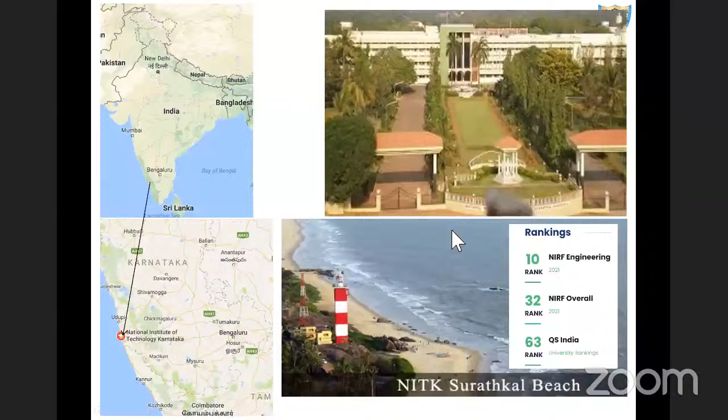So let me talk about the foam. There are two types of foams: one is a closed cell foam, another is open cell foam. So now I'm going to focus on closed cell foam.

For an example, let us take moduli. So in general, in composites, we plot a two-dimensional graph wherein the x-axis is the volume fraction of the filler or reinforcement, and the y-axis is that property, which in the present case is moduli. Then we plot a curve or a behavior wherein as the volume fraction of filler increases, we see what happens to modulus.

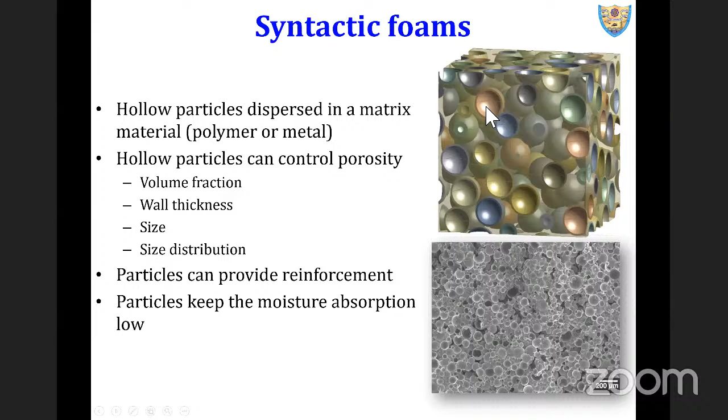So here typically these microballoons are in the particle shape. Those are spherical in nature. Many particles are available. Glass are engineered ones, and those are commercially available.

Fly ash cenospheres are naturally burnt ones, which are environmental pollutants. So from the fly ash, you can extract the hollow particles known as cenospheres and utilize them. These are naturally abundantly available environmental pollutants, so you can find and utilize them in components, products out of them. Engineered ones are available from many companies.

In addition to the spherical one, we have cuboid ones, silicon carbide, Al2O3. But as these have corners, they induce stress concentrations within the system once you disperse them in the matrix, and thereby generally we don't prefer these.

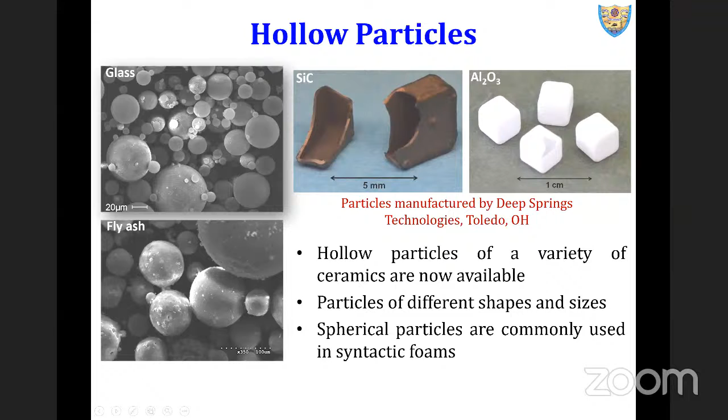We prefer the spherical shape - no stress concentration, and there will be uniform spread of resin around it, because that is a crucial parameter in composites, wherein we talk about the wetting of matrix onto the reinforcement or filler.

There are many applications for composite systems: aviation, thermoforming plugs, wherein you bend the sheet in a specific form. These are the plugs which are used to bend them. Here we need minimum coefficient of thermal expansion, because during a mechanical process heat gets generated, and if you can keep that minimum, then these plugs can easily release the sheet without any additional mechanism.

And that's how many types of these foam plugs are available. Then there's widespread use in offshore applications, wherein we're extracting oil somewhere deep down the sea and transporting it to the shore. When we need to do that, we need to send this crude oil through a pipe, whatever fluid we extract there.

If we don't rope it with these yellow colored modules, known as syntactic foam modules, the pipe sinks and there is every chance of rupture of the pipe and spillage of the fluid which the pipe is carrying. And that's how we rope them in these syntactic foam modules, which keeps them floating on the water, avoiding any damage to the pipe.

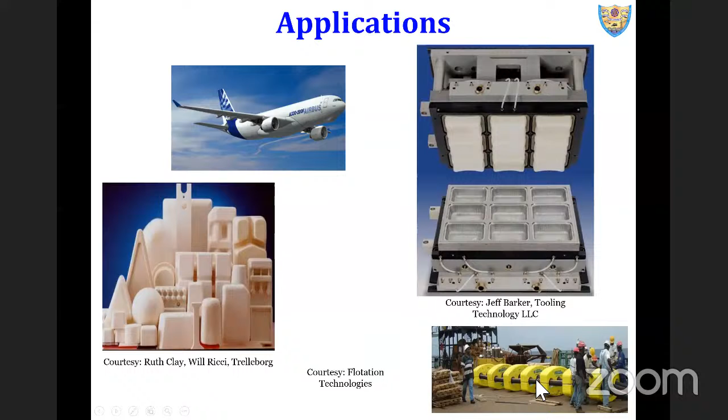There are many applications, as mentioned by Professor Nikhil Gupta in one of his papers on applications of syntactic foams, wherein we have a human-operated vehicle Alvin, used to find the wreckage of the Titanic in the 1980s, which carries 3 people on board, and we need the foam to be part of this module to go deep down the sea at a specific depth.

And we have remote operated vehicle Jason, which is a maintenance module for underwater pipelines. At many areas of warships, it has been used as well. James Cameron used a module completely made up of syntactic foam, known as Deep Sea Challenger.

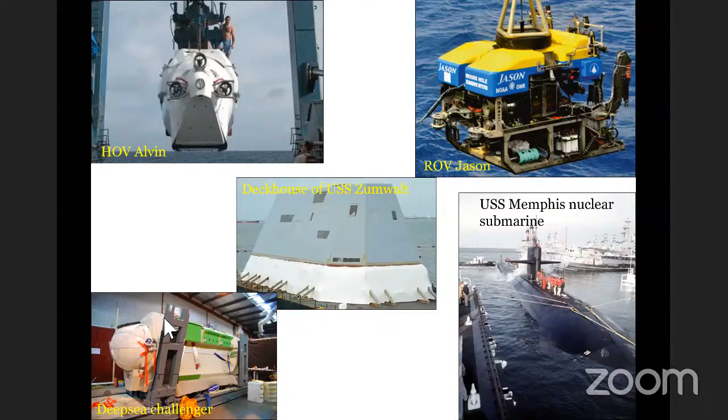So in the present talk, I'm going to focus on what my research group was doing in the area of syntactic foams. We are exploiting high density polyethylene with cenospheres, fly ash cenospheres, which I mentioned, which is a naturally occurring pollutant, and engineered glass microballoons as well.

We kept the filler percent the same so that we can compare apple to apple. Below 20%, when you infuse this reinforcement, which is in spherical hollow form, we'll end up with a higher density material, which is not suitable for buoyancy applications or lightweight structural, weight-sensitive structures.

Above 60%, a lot of particles or fillers start interacting with each other in the matrix system, and there's every chance that particle to particle interaction causes them to fail and break. Then the density shoots up suddenly. And that's how we kept it the same, based on our pilot experimentations.

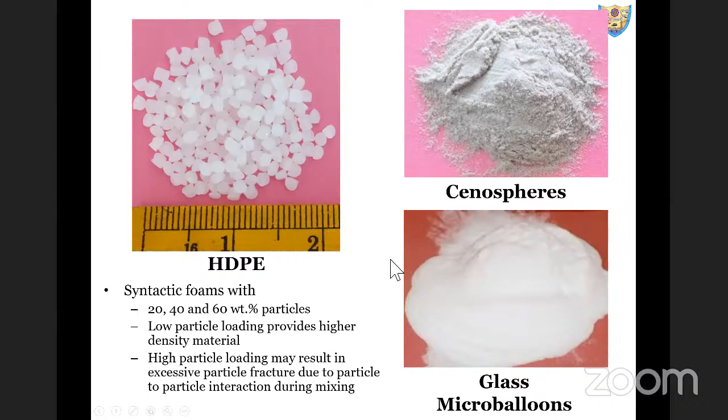We exploited many industrial scale manufacturing systems to produce these foams, starting with injection molding, compression molding, and recently 3D printing. And that's how my role in 3D printing of foams comes into the picture as part of this talk. So I'll let you know why we jumped to 3D printing - where was that gap we found out in 2016 to switch over to 3D printing, and therein we explored the additive manufacturing route for manufacturing foams.

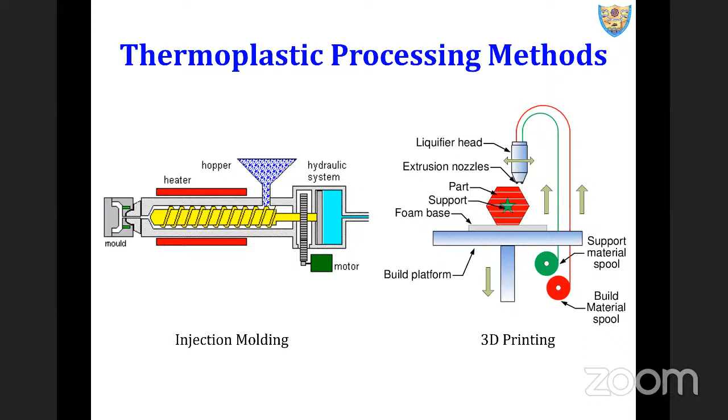This work was collaboratively done with Professor Nikhil Gupta of New York University. So what we did as an outcome of the first PhD student from my group in 2016 is this.

Konkan Specialty Polymers Limited from Mangalore, Conspec, supported us in this task, wherein we used their injection molding machine on the shop floor. So this was completely an industrial scale development and not laboratory scale development, where laboratory scale development happens in a very closed and controlled environment.

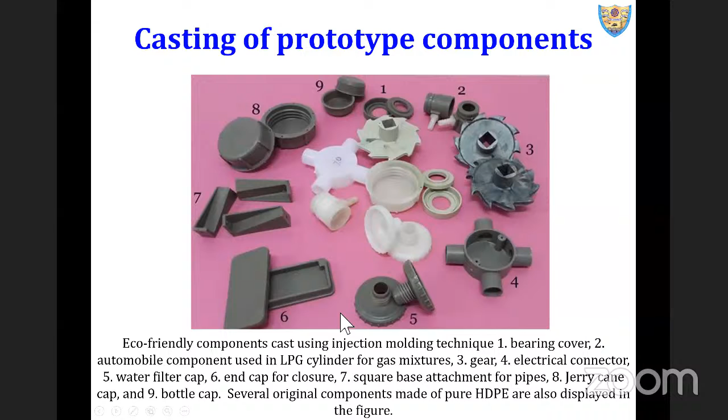Everything went well except component number 3, which I'll show you again here. If you see this component number 3, which is a polymer gear, you can see multiple white patches here. These multiple white patches signify that the fly ash cenospheres, which are gray in color, didn't reach these locations. The obvious reason is complex geometry, with thin to thick section continuous change.

And this made this component fail. Fail in the sense it worked well mechanically, but appearance-wise, in terms of dispersion of cenospheres, this component did not show that prominence in injection molding.

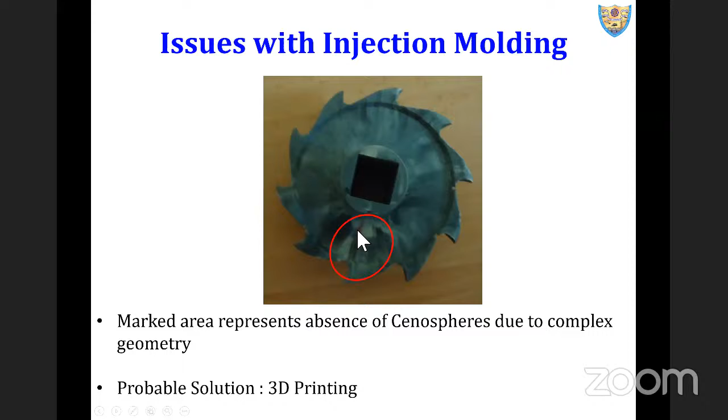So as part of this problem, which came up in the PhD thesis of my first student, Bharat, we proposed this problem to the Department of Science and Technology System Development Program under the Additive Manufacturing Technologies scheme back in 2015, arguing that since this is a problem in injection molding, 3D printing would be a viable option to resolve it. That's what led to the first funding I got in 2016 to additive manufacture the syntactic foam, thermoplastic based.

As part of this 3D printing, as all of us already know, this is the 6th day you are going through. It's the CAD file which we send to a device known as a printer, and this CAD file gets converted to a layered deposition at the printer level. That means we have very high flexibility of design change without any additional cost for tooling, as against any other conventional manufacturing methodology.

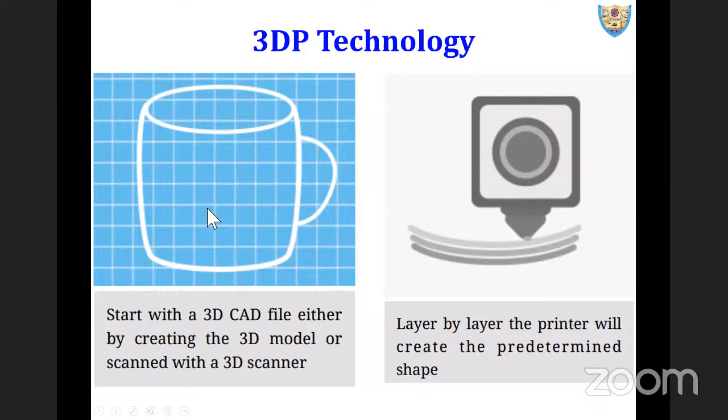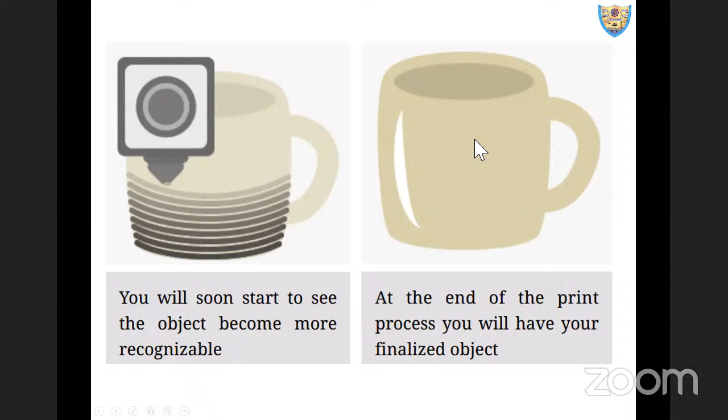So if I want to change the shape, I can just change the CAD drawing, and the printer immediately starts printing and realizing that particular component in the next batch. So it's a highly flexible system. Tooling cost is zero, with minimum lead time.

So what I'm going to talk about is fused filament fabrication system, which is also known as FDM. The FDM word is copyrighted, so I'll use fused filament fabrication, wherein the wire or filament, made up of polymer, is fed to an extrusion head. The extrusion head melts it and deposits based on whatever CAD file you have sent, which gets converted to a machine language known as G code. So it traces that path, and on a platform, you build a particular component.

This is the setup we have at NITK Surathkal since 2016. All the machines are still running and being exploited to their maximum potential.

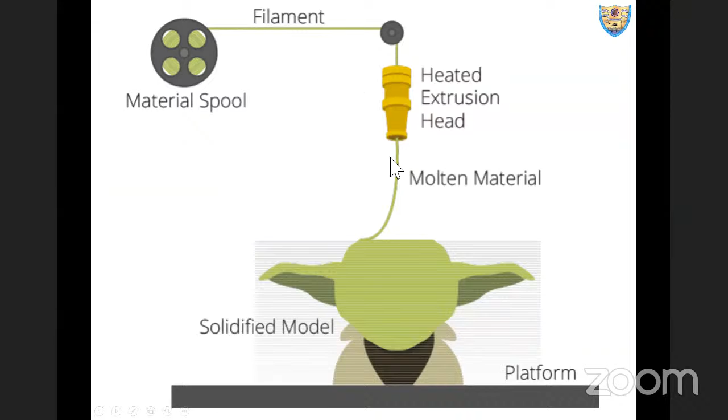So here we have a 3D printer having a build volume of 500 millimeters by 500 millimeters by 500 millimeters, with a temperature range up to 450 degrees C. And we can utilize any filament we want. This system cost me 20 lakhs, procured from AHA 3D in Jaipur, Rajasthan.

Now, we manufacture our own filament as part of this DST project, which got completed in 2020. For that, we have a single screw extruder, which is non-vented type.

Here we feed the pellets, composite pellets, into the hopper, and draw the wire required for a 3D printer. Generally two diameters are preferred: one is 1.75 plus minus 50 micron, and the second is 2.85 plus minus 50 micron. So that we can manufacture here.

The composite blend is prepared in a polymer blender, wherein we mix the polymer and whatever filler you want, melt it, and blend it. The blend comes out, we shred it, chop it, and load it into the hopper of an extruder. So this is the first heating cycle.

Second heating cycle, and the third heating cycle. The third heating cycle is in this heated extrusion head. So likewise, there are three heating cycles the polymer comes across.

So we need to really look around all the basic characteristics and characterizations of the polymer pertaining to TG, melting point, and degradation temperature. And those parameters will set the limitations for blending, extrusion, and printing. All these systems are available.

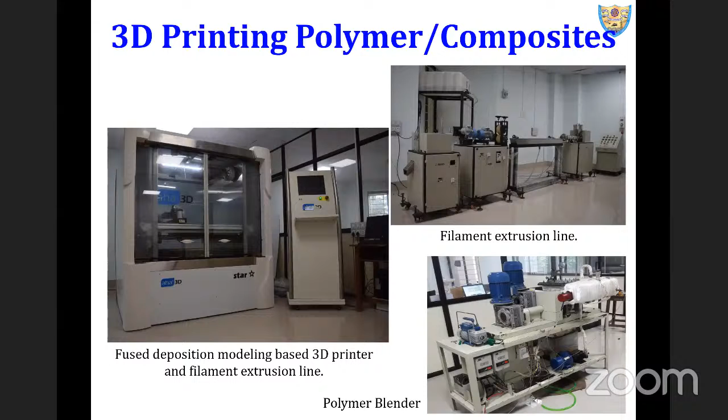These two we procured as part of the DST grant. So whenever we talk about in-house filament manufacturing, and whenever the developmental efforts are for material innovation, then we need to devise, define, and develop our own material system. And that's how these three systems are being used for that.

When we do that, we need to find out suitable parameters for blending, for filament extrusion, as well as for printing. So in this filament extrusion, we have barrel temperature, wherein we have a barrel here. There are four heating zones.

This is procured from Asabi, Thane, Maharashtra. Then we have die temperature, screw speed, and takeoff speed. These define the filament diameter, whichever way you want. So barrel temperature and die temperature decide, from the feed section to the die section, what temperature profile you want. And that again we decide based on TG, melting, and degradation temperature of the polymer.

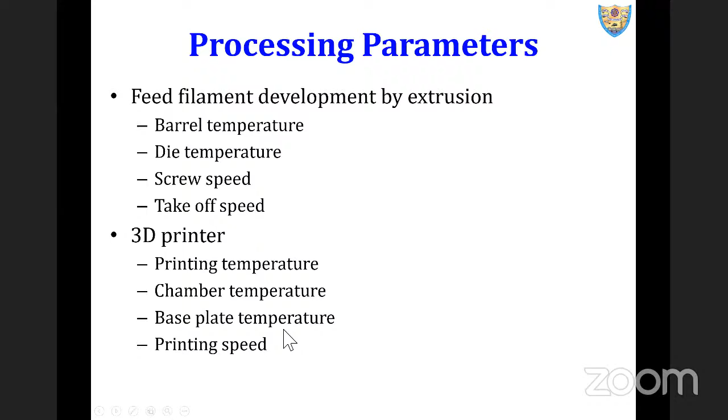Then we feed these filaments to a printer, wherein printing temperature, chamber temperature, base plate onto which you deposit the material, and the printing speed need to be tuned.

So as part of the syntactic foam development pertaining to this filament, I'm going to talk now.

That means we need to modify or optimize and find out suitable extrusion parameters. We did so, and finally we got these good filaments which are 2.85 within plus minus 50 microns.

These are air pockets, and these are because of the machine limitation. As I mentioned, the machine we have, a single screw extruder, is a non-vented type, and thereby the flue gases get entrapped. Interesting to see is that these flue gases, or air entrapment, have been uniformly distributed. So we have reported that as well.

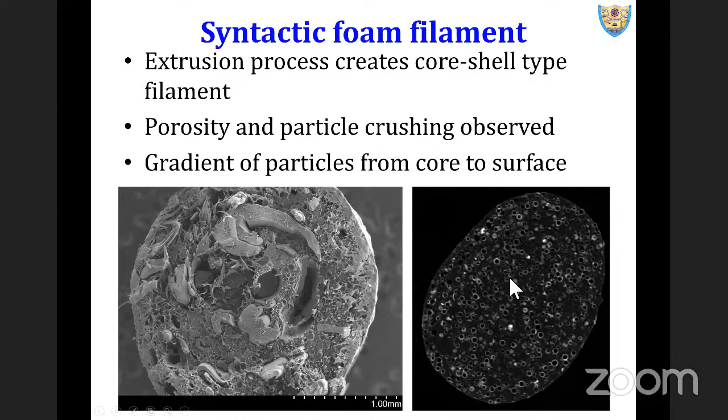This is 40 percent by weight in HDPE matrix, this filament, one time extruded. 1x means, then 2x is this one time extruded filament which we chopped again, pelletized again, and extruded again, and that becomes 2x here. And this one more cycle gives 3x.

Now 1x, 2x, and 3x, we did that to check the recyclability potential of the developed filament, number one, and to check how many micro balloons have survived, so that we can have that syntactic foam or lightweight effect.

So this is an additional exercise we did at that time. No doubt there are a few failures, and those are also quantified and reported in our previous publications.

We can do CT scanning at 3 different planes of any material system and look around how the distribution goes.

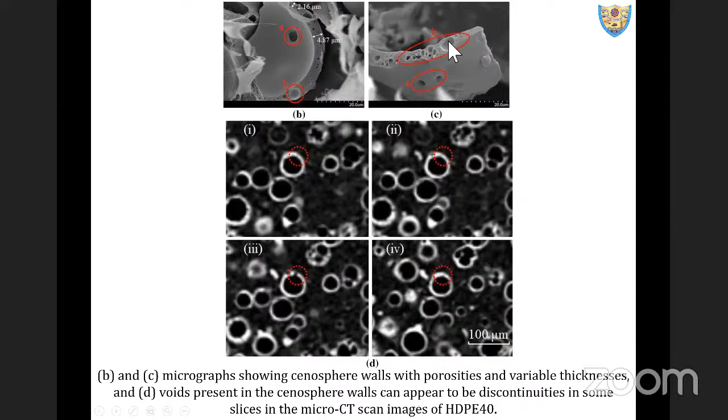Because these fly ash cenospheres are naturally burnt, they have a lot of surface defects on the surface and within the wall. This is the broken cenosphere. If you can see this, the wall thickness is variable and even the wall is porous. So when you do the micro CT, though the microballoon is intact, it seems to be broken because of these inbuilt wall thickness porosities. So we need to interpret the micro CTs carefully.

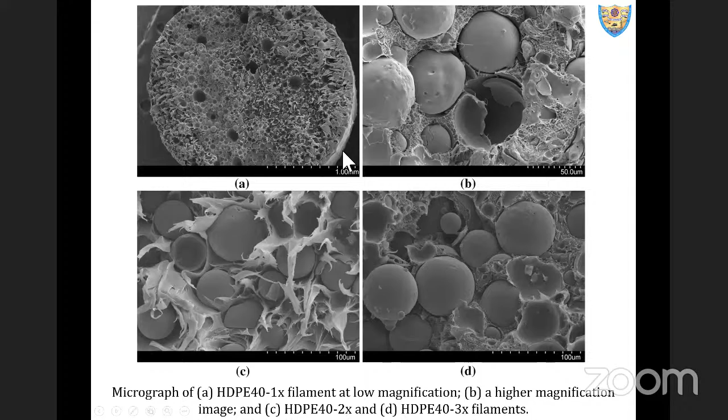Now, once you develop this filament, before jumping into 3D printing, you need to have a counter check. And that counter check we did here. So we compared the filament, the filament which is 2-time extruded, 3-time extruded, with the injection molded sample.

Now what do you mean by injection molded sample? It is 165 in length, dog bone type, strip type. So we have compared the filament which is developed with the full-fledged dense sample. And this is one counter check probably advisable before jumping into 3D printing after filament extrusion or filament development.

And what did we see is the 3-time extruded sample is performing better than the 1-time virgin injection molded sample. So this means it definitely makes sense to utilize this filament for 3D printing, wherein the 3D printed part is going to perform superior than the injection molded sample. So this probably is a good counter check that all of us can do whenever we have developmental efforts.

And here the same filament has been tested for 3 different strain rates. ASTM standard says 1 strain rate, but you can always increase or decrease the strain rate, which will give you additional insight of material behavior.

So how do these values signify to physical applications? I'll just take one simple example. 10^-4 is the slowest rate of loading. Relatively, 10^-2 is a higher strain rate of loading.

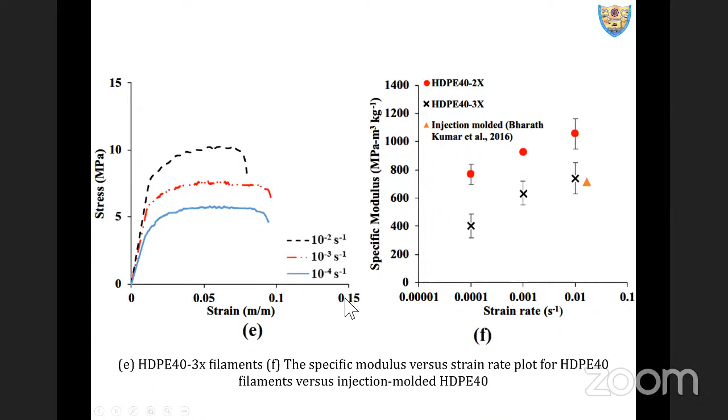And that's how it is useful if you do your mechanical test at different strain rates, which gives you additional insight that if the strain rate changes, how the material behaves. And this is what we do for sole development, wherein material development, we need to look around different applications at different rates of loading. So this is an additional thing all of us can do once we develop a new material system.

So once you develop a 3D printing filament, once you get assured based on tensile testing of the filament as compared to the injection molded sample for the same material composition, that the filaments are doing well, then definitely you should venture into 3D printing, because that gives you an assurance that the time and development efforts spent are worth looking around the 3D printing.

Now, as we are handling an altogether different material system than commercially available material systems in filament form, issues with parametric optimization or choosing suitable parameters come in. Now, what you have in the 3D printing regime presently, if you look at polymer base, you have HIPS, ABS, PLA - all these filaments are readily available. But if you want to try out a different material system, these issues are bound to happen. And this is what happened.

When we start printing HDPE, there were multiple defects here. Warpage was too high. This is the base plate, which also warped in addition to the sample. So after half of printing the sample, around 1.5 millimeters, the sample warped, and while warping, it made the base plate also warp.

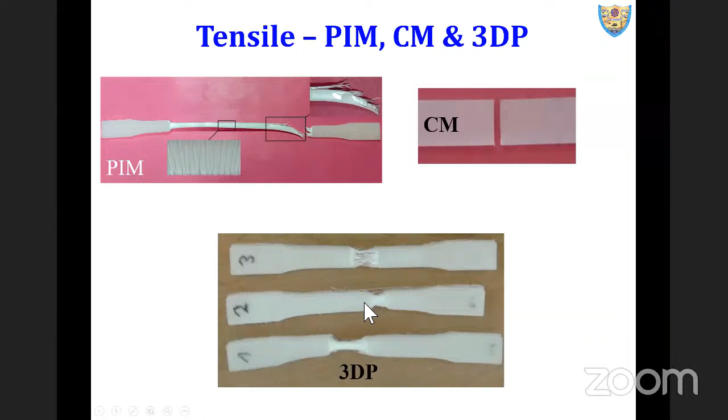These are engineered ones having a diameter of around 15.3 microns, which we are now going to mix. What I talked about previously was cenosphere. I'm now talking about the glass. So this glass we're going to mix in the high density polyethylene. We prepare a blend of glass in the HDPE matrix.

So what we are going to look at now henceforth is manufacturing of a sandwich in one go using 3D printing. For manufacturing of a sandwich using additive manufacturing or 3D printing, we need to use two materials, one for core and another for skin. So here we are keeping the skin as high density polyethylene and core as the mixture of these two.

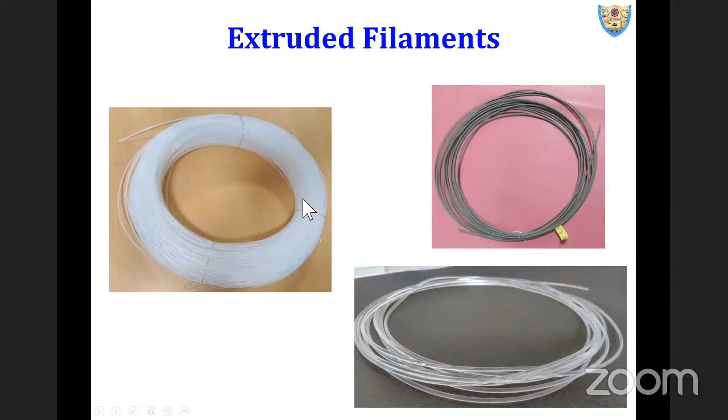We have pure HDPE filament, which acts as the skin for the sandwiches. So we feed this in one nozzle, HDPE filament, and we feed the foam filaments in the second nozzle. So we exploited the second nozzle, which is supposed to be used for support material, and used it for the core to print a multi-material system.

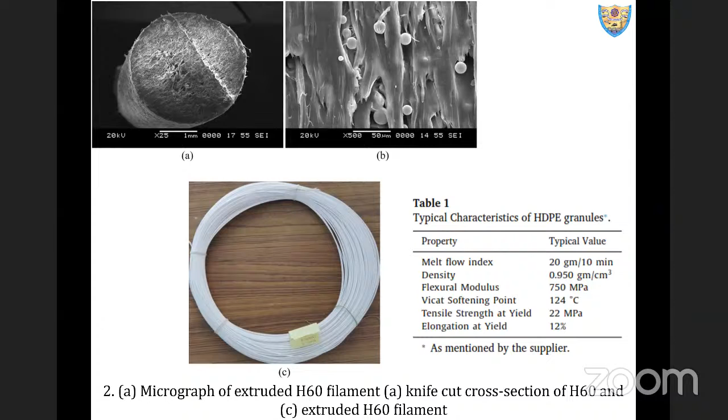So what we did is, as the 3D printer has two nozzles, we can call primary N1, N for nozzle, and secondary N2. N1 and N2 are fed with, as I mentioned, HDPE and foam filaments. Both nozzles are utilized while printing the sandwich. N1 deposits the lower skin, the central portion is N2, and again N1 comes into the picture. And this is how we prepared a sandwich.

And we can code them as SH, S for sandwich, H for HDPE - SH20 if the core is having H20, SH60 if the core is having H60 as the filament which has been fed.

And then you can decide the suitable dimensions for whatever test you wish to do. And then based on that, build a model, send it to appropriate software, which will create a STL file. The G-code can then be sent to a printer to print all this.

And before that, we did the exercise of finite element simulation using ANSYS. So 3D printing, as we all know, involves complex heat and mass transfer phenomena that affects the dimensional accuracy of the final part.

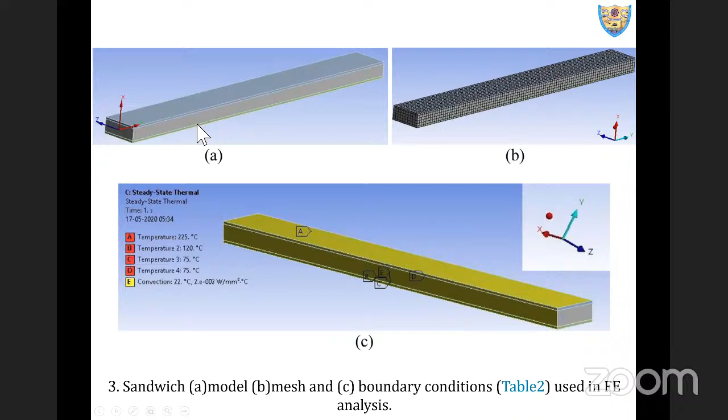So we carried out the thermomechanical FE simulation using ANSYS. We fed the properties of skin and core independently. We defined the elements at the interface, merged the nodes at the interface, and followed the regular procedure laid down for analyzing a multi-material system in ANSYS. And then we found out the temperature profile that I'll show you later.

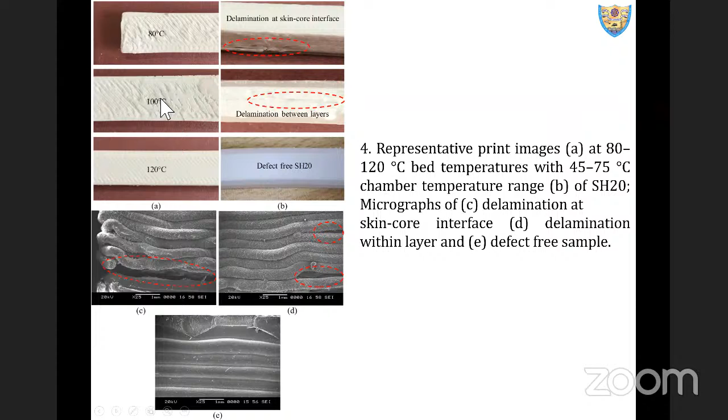Then we looked at once we get the defect-free sample here - related parameters are frozen, and then we touch the next parameter in sequence.

So now here again, you see the prints through N1 and N2. N2 is for our foam, N1 is for our neat polymer - HDP filament is fed in N1, foam filaments are fed in N2. Again, if you go on changing the temperature, different defects start creeping in.

At one temperature, a good, sound sample comes out. Similarly you can see multiple lands here, voids - sorry, pockets here, lands here - and at 245, the core resulted well through N2.

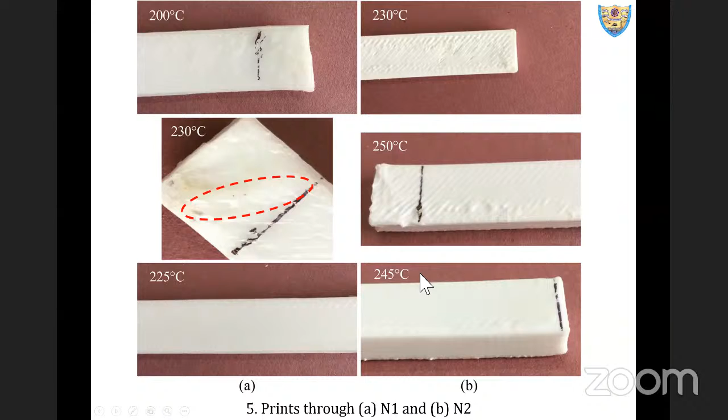So again, now these two parameters are frozen, and then we start with the next one, which is commonly called a prime pillar.

Now this, especially when we're talking about printing of sandwich structures using a single nozzle system, it is a difficult task - I'm not saying it is not possible. Using the same nozzle, you can print a sandwich as well, but you need to keep on changing the filament.

And there is every chance that, in case of a multi-nozzle system, the second nozzle might not start precisely at the same location from where you need to start. So we print additionally, and then cut it off, and that is known as a prime pillar. This is without prime pillar, wherein the deposition gets improperly laid. But with the prime pillar, as defects are localized to an additional part which can be cut later, we can get a good sample. So this is one more facet we can look into.

Most crucial is warpage. Warpage during printing, which I have shown you earlier. So warpage during printing is this.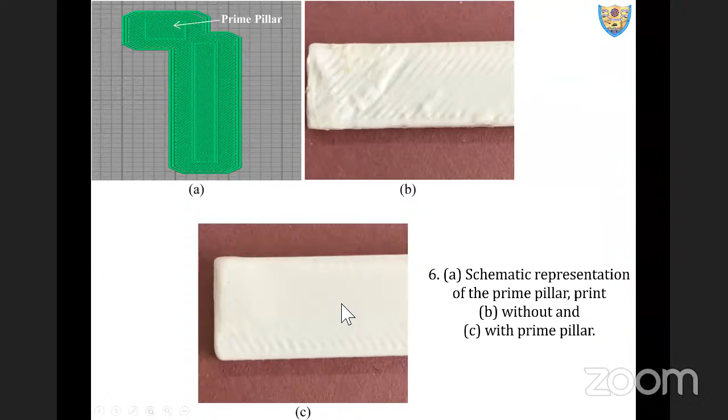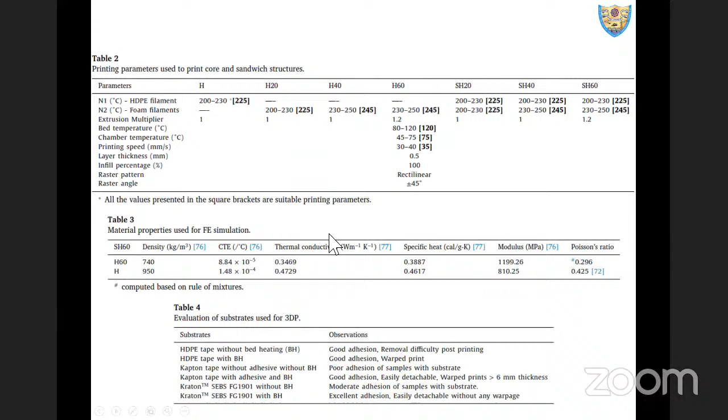I'm talking about an issue you need to address when working on material development or 3D printers, which is our present focus at the lab: warpage post printing. So once you address warpage during printing, next comes warpage post printing.

Now this is the sandwich sample which got printed. This is what you see. While printing, it prints perfectly. But after printing, as we leave the sample on the bed to cool, the complete sandwich bends like this. You can see there is no interface failure—we did not observe any separation, neither under the SEM nor by naked eye, between the skin and core and the skin subsequently. But what we did observe is this warpage happening completely post printing.

So for that, we need to look at the suitable chamber temperature. Many printers have open architectures where this isn't possible, but where you have an enclosed chamber, you can adjust the chamber temperature to maintain a proper gradient during cooling, or the annealing process as we call it, and then choose a suitable parameter which will give you a perfect sandwich sample. You can see the color differentiation here—this is skin, this is core, and again there is a skin down line. This is how we can perfectly produce the sandwich sample.

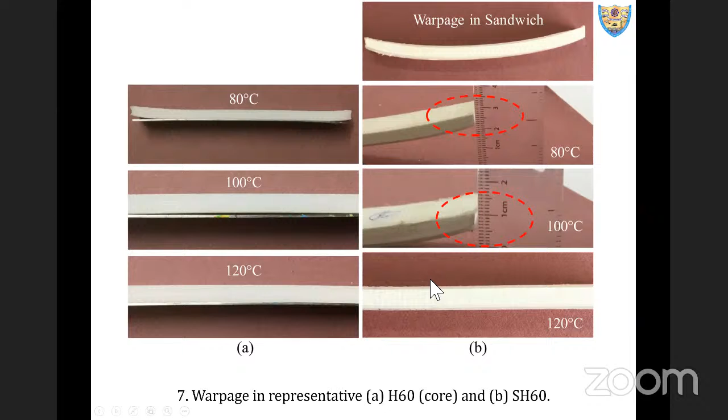In addition, though layer offsetting is a machine-dependent parameter, we need to keep an eye on this. This is nothing but the distance between the two nozzles. If the machine is used very often, we need to look around this offset. If you don't look at that, there will be an offset like this. This offsetting is a machine-dependent parameter which you need to look at, set, and compensate for. If you compensate, your samples will come out good.

Then, depending on the printing speed, this is how the samples show defects at different printing speeds. At a suitable printing speed, you will get a perfect sample without pockets, without islands, without scrubbing off your nozzle into the system which is being made. So we need to look around all these parameters when we are really looking at different material systems.

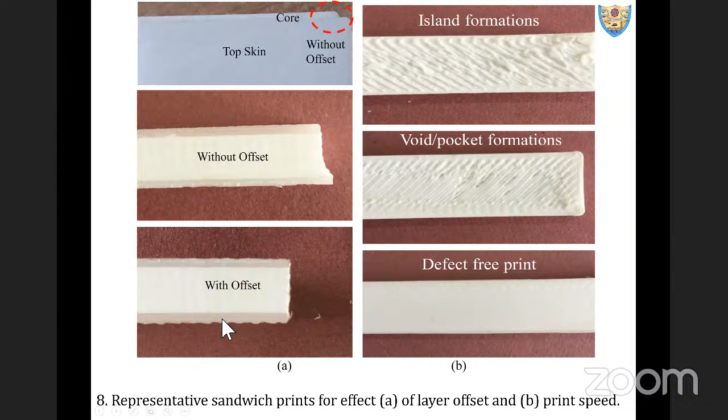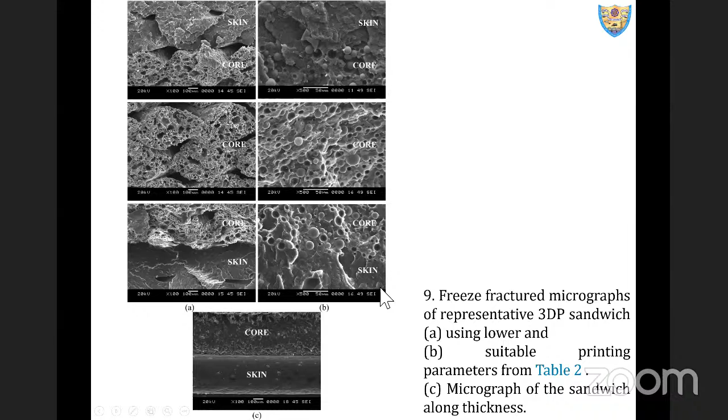These are for non-suitable parameters. How does it look? For suitable printing parameters, all these residual microporosities go away, and you can see a seamless interface between the skin and the core, and the skin. On the edge, you can clearly see in the micrograph something like this. So this is how it looks, and you need to look around all these printing parameters to finalize a good quality, sound sample.

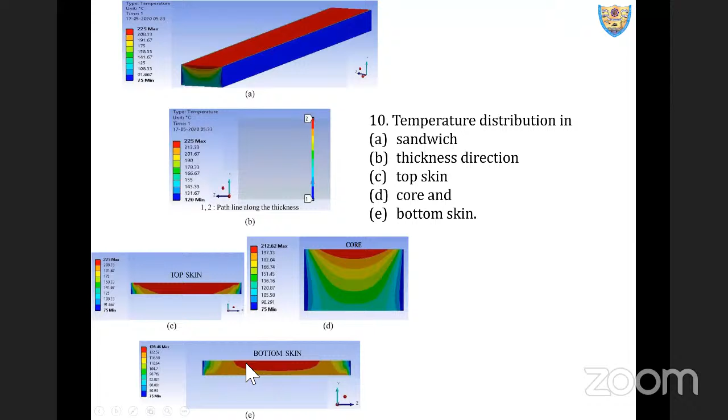Then, as I mentioned earlier, we did the finite element simulation, and the sole purpose of doing this simulation was to understand the residual stresses in the system, especially at the skin and core interface. It's a simple one—we found different stress distributions along the thickness, across the thickness, and most importantly, we wanted to know the temperature and stress distribution in the sandwich which is being printed.

So whatever printing parameters we mentioned as suitable, we applied the same printing parameters and boundary conditions in the form of temperature, and simulated a finite element model. This is the temperature distribution we get, and this is the stress distribution we get. Experimentally, getting the stress distribution in the sample is difficult, and that's why we chose this finite element simulation route, where you can see at the skin and core there is a drastic change in the stress.

Same here—in the core, it is almost similar, but no doubt, from the bottom to center and from center to the top skin, there's a slight change in the slope. The basic intention behind looking at this is: can we do something to reduce this drastic drop and rise at the interface? Are there any possible avenues?

There are many possible avenues—like you can put a blower during printing of the bottommost skin and the first layer of the core, and many others as well, where you can try to find out ways to minimize this stress distribution. And that's how these finite element simulations, or thermomechanical analysis simulations, help us.

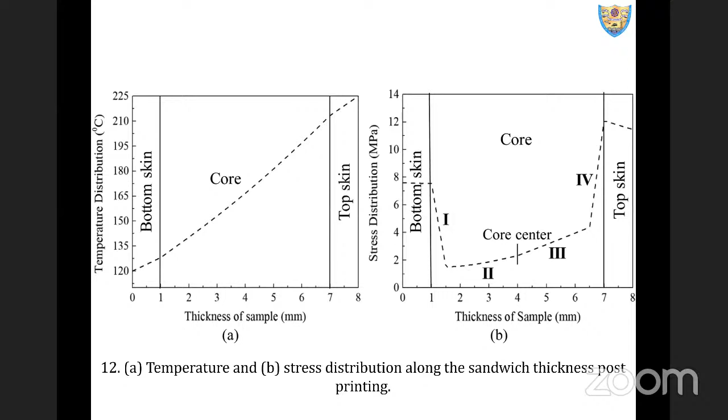So with this, I'll stop the presentation. This is what I presented as part of my research group—what we did and what we are doing as part of different systems in 3D printing. So I thank all of you again for listening patiently. If there are any questions, please let me know.